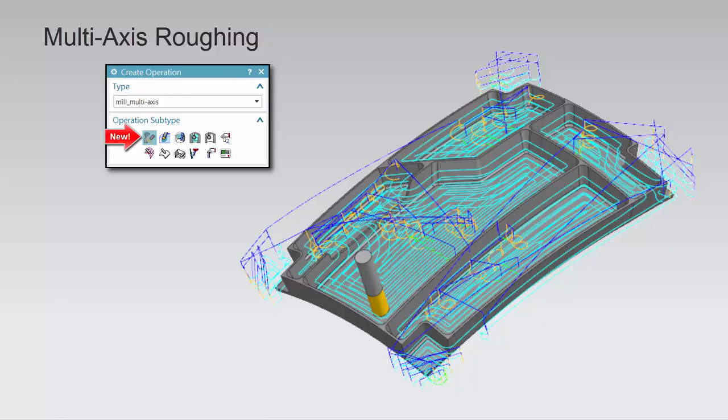Multi-axis roughing is a new operation subtype recommended for 5-axis roughing of complex shapes. Levels are cut by offsetting from a drive floor or ceiling or by interpolating between the two. You may use ball, bullnose, or flat end mills.

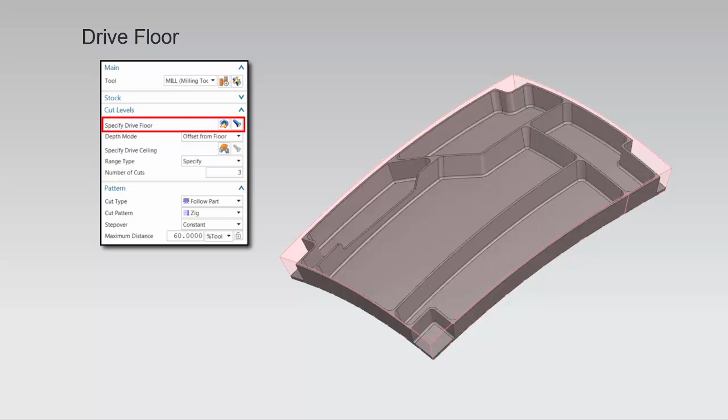You must specify the drive floor. The drive floor must be a single face and may be located below, inside, or above the volume to be removed. Here, you can see the specified number of cuts offset from the floor.

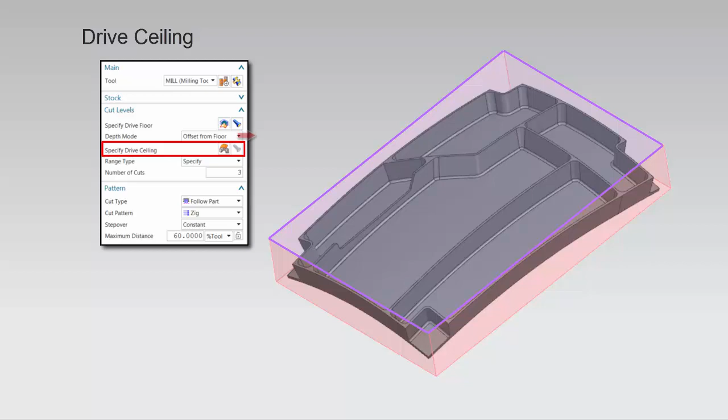Like the drive floor, the drive ceiling is defined by a single face. A drive ceiling is required when the depth mode is set to offset from ceiling or interpolate between ceiling and floor. Notice how the cut levels morph as the tool cuts from the flat ceiling to the contoured floor when the depth mode is set to interpolate between ceiling and floor.

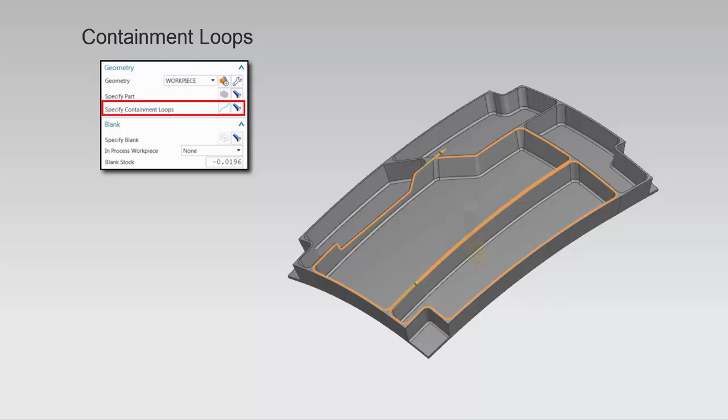Containment loops may be specified to limit the cut area. Here, you can clearly see, when using a single cut level, how a containment loop defined by the top edge of the part limits the cut area.

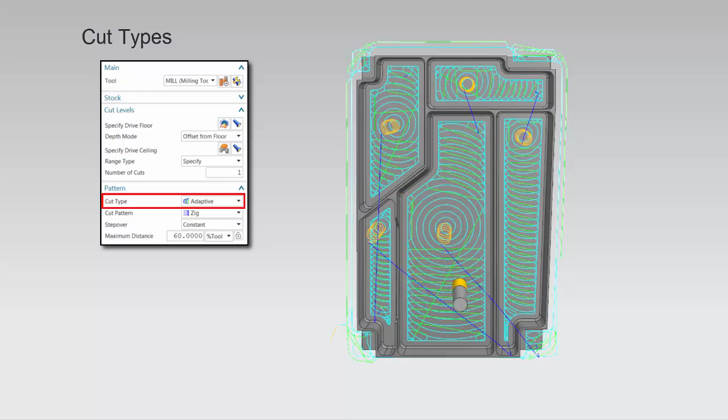Available cut types are follow part and adaptive. Adaptive creates a pattern that conforms to the shape of the cut area, maintaining a constant cutter engagement with the material rather than being based on a specific cut pattern or cut direction. Adaptive may be used with a zig or zigzag cut pattern.

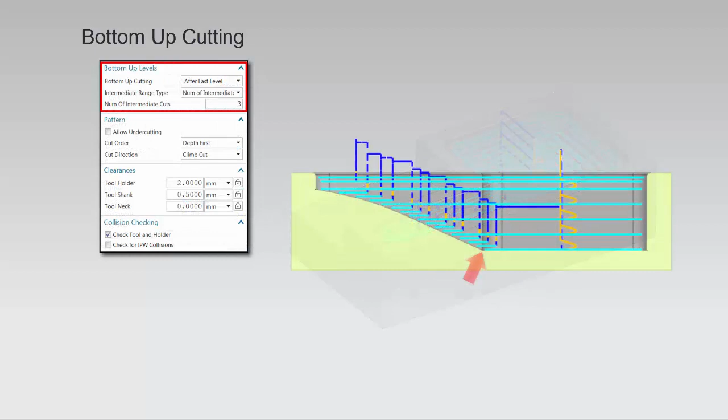Bottom-up cutting recuts the tapered walls between levels from the bottom up. This ensures that the uncut stock is minimal, consistent, and evenly distributed, helping to stabilize cutting tool performance during semi-finish and finishing operations.

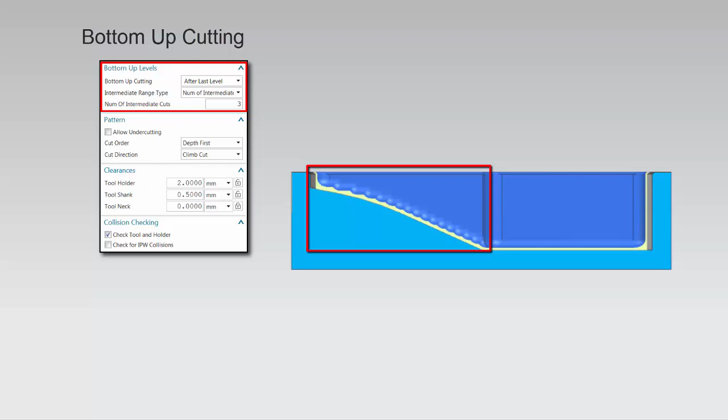After last level leaves the bottom-up cutting to the end. Between cut levels cuts intermediate levels from the bottom up after cutting each main level. The intermediate range type lets you specify the number of intermediate levels in terms of number of cuts or cut depth.